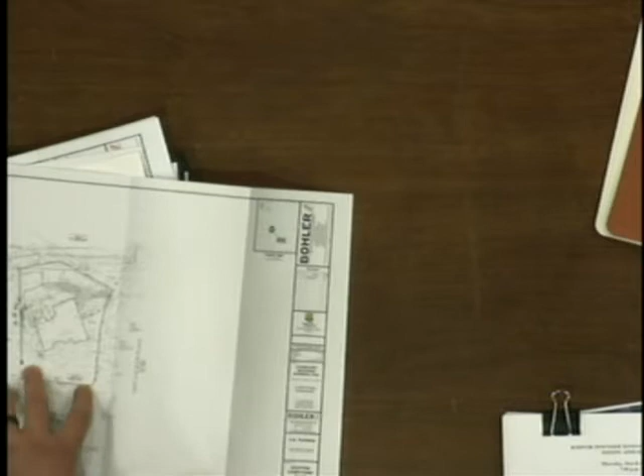Let's jump to Exhibit A7 out of order. Is Exhibit A7 the plan that shows the slopes subject to regulation that require a variance and special exception? This exhibit shows only the slopes greater than 20% that are regulated based on the previously approved grading plans from the original development and when the deck was done. So we've isolated it down to these two portions.

The section in the rear of the house is approximately 500 square feet, sloped at approximately 21%. The area to the right is slightly steeper, but that's only 150 square feet and very similar to what was previously approved as part of the original development.

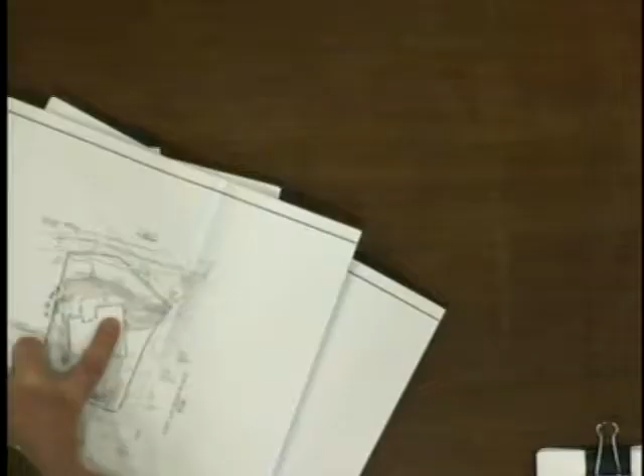Let's go back to Exhibit A5. Walk the board through how you arrived at what slopes are subject to regulation and which are exempt. On this plan, you'll see the light gray and dark gray, based on current conditions. We've also overlaid a red hatched area and a blue hatched area. The red hatched area is from previously approved plans where the slope was shown to be greater than 20%, which we would normally be allowed to disturb.

You can see that some of it does overlap in the eastern portion of the site, which is why it is reduced on Exhibit A7 compared to the original existing conditions plan A4. That's how we're limiting the area we're asking for the variance, based on what was previously approved and what we're going to disturb now.

So the red and blue areas are ones you consider exempt because they were subject to a grading permit? Correct. Do we have a grading permit? It's from the original subdivision plans for the development from 1996.

Is that an exhibit? I don't believe we have the original subdivision plan as an exhibit here. I'm being told by my client that it's recorded here at the township, but it is of record in the township's files.

You do have a portion of it. Is it in the application? A portion of it was included. In this actual application, Exhibit A1 — hold on, it is Exhibit C — has the grading and utility plan from the original Laurier, the DeMoss Tract plan.

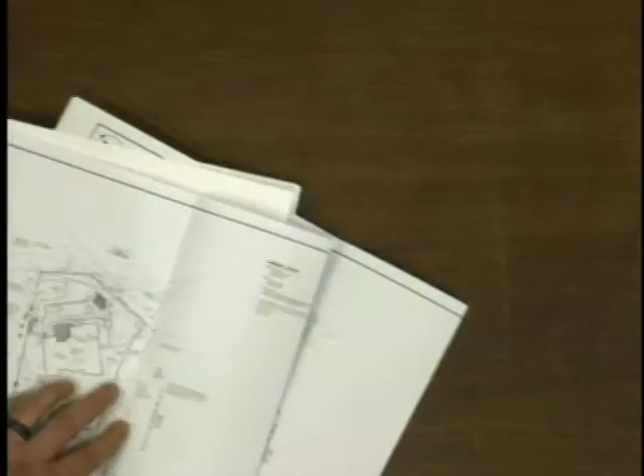I think that establishes the area of steep slopes that we're requesting the variance for as part of a disturbance. So I would next go to Exhibit A6, which shows the improvements being proposed as part of this project. Could you detail what's being proposed here and how this design has changed over time to reduce the encroachment into the steep slopes as much as possible.

There is an existing deck that was built that is currently in need of repair and going to be removed as part of this project. We will be shrinking a portion of the deck to make room for a swimming pool, patio, spa, and pergola. In order to have everything fit on the site, we had to reduce the size, partially based on having two front yards and the constraint for the maximum impervious coverage. So we have reduced the size of the pool, which is shown as 16 feet by 36 feet approximately, whereas we would normally propose something on the order of 20 feet by 40 feet. We have also moved the spa into the pool slightly, further reducing the footprint and disturbance area.

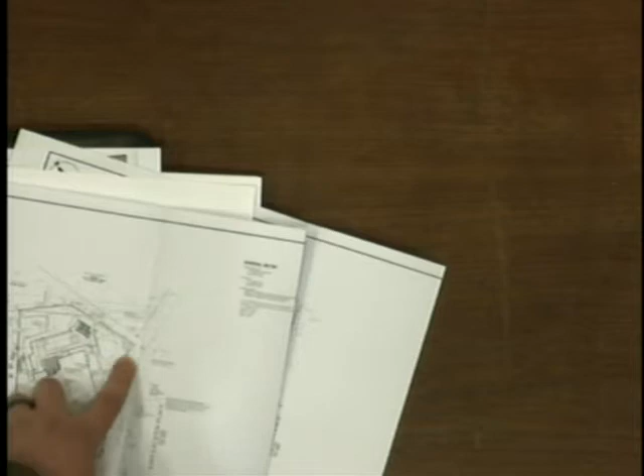As part of this project, we're also proposing stormwater management, which you can see on the eastern side of the property. It is just a rectangular box outside of the decking area and the pergola that's being proposed. That's labeled as the proposed infiltration trench. Correct.

We go to Exhibit A8. Which plan is A8, Chris? A8 is our site grading and E&S plan, which shows the proposed grading, erosion sediment controls, and the rest of the drainage needed for the stormwater management system.

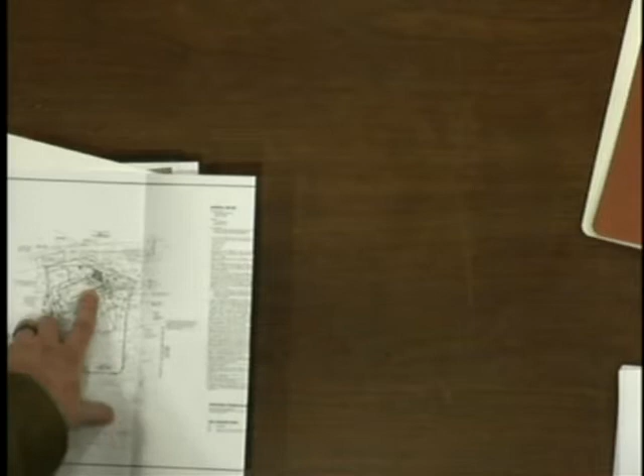Does this plan also overlay the proposed improvements on the sloped areas? Yes. And what areas are impacting what we believe to be the regulated slopes that are 21%? A portion of the spa, swimming pool, and pergola in the back corner of the house. And as part of the special exception, we also have the stormwater management system, which is impacting the slopes in this area to the east. But the remaining portions of the improvements and grading are not in the regulated slopes, correct?

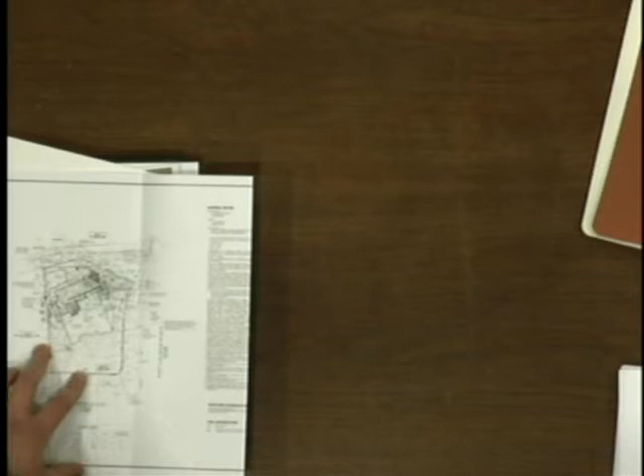Correct. In your opinion, is there any way to access the rear of the house for any construction without going through the steep slope areas? No, the driveway is located on the eastern side of the house, which is where access will be taken from. So you'd have to cross those steep slope areas to get to the rest of the backyard. Yeah, to do any project or construction in the rear of the house, you would have to disturb those areas.

If we go to Exhibit A9, which is an aerial, could you please locate where the proposed residence is located on this aerial? The bottom center of the page, where the pin says 117 Lawyer Place. And are the proposed improvements consistent with the improvements adjacent in terms of pool and decking?

They're actually smaller than the neighboring projects that were done for the swimming pools and decking. And if I go back to the application, I believe there are some photographs of the property, is that correct? Yes. All right, so if we go back to the application, Exhibit A1, Exhibit F attached to A1, I'll give everybody a chance to catch up. There are a number of photographs of the house, isn't that correct?

And if we turn to the third photograph, could you please describe for the board where that's taken from and what it shows? This picture is taken of the rear of the house. On the left-hand side is where the steep slopes are shown on the existing conditions plan that we would be disturbing. Those slopes look pretty gradual, isn't that correct? Yes. And is that the existing deck that's proposed to be removed? Yes.

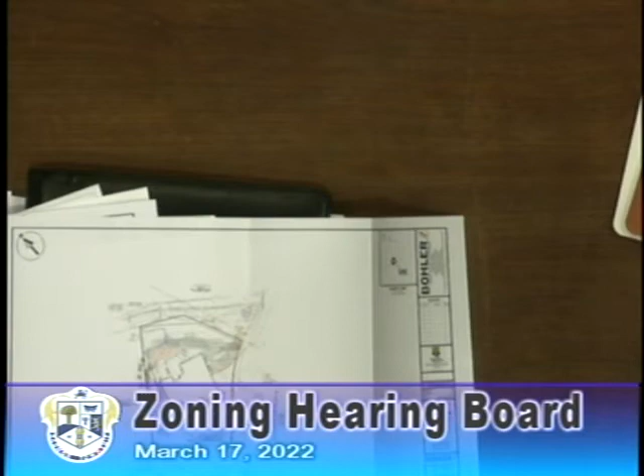I thought you had an open space corridor for the stream. There is an open space for the stream—the stream adjacent to the property, between you and the 200-whatever house, where they have all those stones piled up. Well, we wouldn't be touching that area. That's in the rear, all the way. It's basically a row of hedges that block the stream.

Thank you. Are there any other further questions?

If there are none, I'd like to move for the admission of my exhibits A1 through A11 into the record. So moved. Thank you. Is there any public comment?

Okay, now I'd ask the board if someone wants to make a recommendation. Mr. Chairman, I would move that the applicant be granted relief from Section 280-112D and Section 280-112E of the code to permit disturbance of and improvements upon steep slopes as indicated in the testimony and plans, and in addition, to grant a special exception under Section 280-112N2 of the code to permit the placement of a stormwater management trench in a steep slope area.

Could we add a condition of meeting the requirements of that subsection? With the special exception being subject to meeting the other requirements of that subsection. Jamie, thank you. Discussion?

Anybody? Any questions? Well, I think—thank you for the presentation. You're welcome for being here tonight. I think there's a lot of elements of this that help me get there as far as supporting your application. And assuming everything is as we have seen it, there are certain de minimis aspects of this in my mind. So I would support the motion.

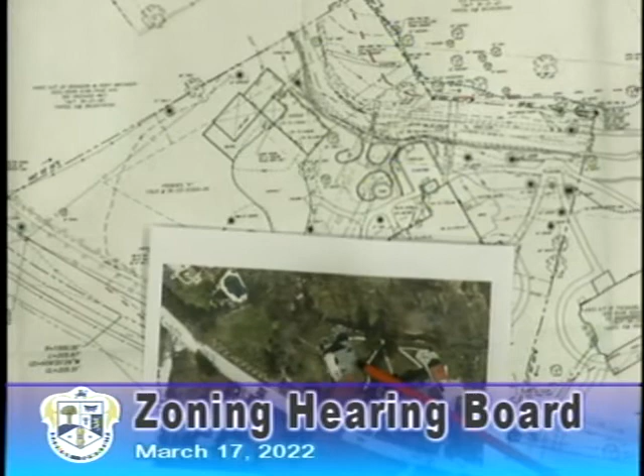Okay, I'm going to show you A3, which is an aerial photo. Can you point where the house is that you own? So hopefully I'm looking at this right. This is the house, and then the garage would be right here. And you see, is this the stream in the back? That is the stream in the back, yes. And here's the road? Yes, and this is Brookside Avenue.

Okay, you mentioned the stormwater runoff. In what direction does that stormwater runoff generally come from? I think you have a slide, and you'll see another one in a bit, but all the water is pretty much coming down Brookside or coming down Askin Road this way, and this is our driveway, so it comes on each side of the driveway and down the driveway through the middle of the property.

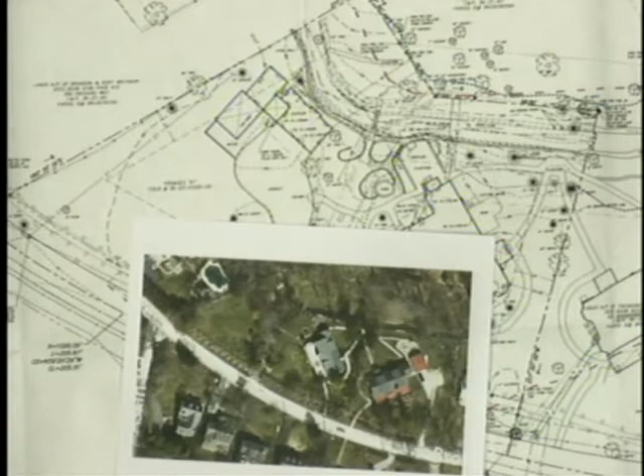All right, I'm going to show you A4, which is another aerial of the house. Is that your property? That is our property, yes. And there's the roadway, correct? Yep. Okay, seems like in the back, at least, it's heavily treed and buffered. Yes.

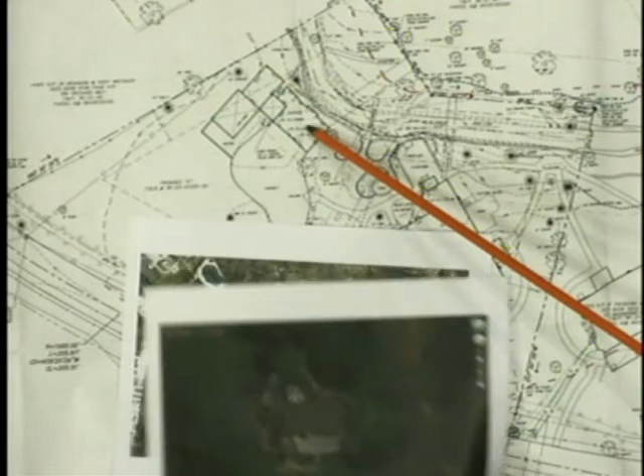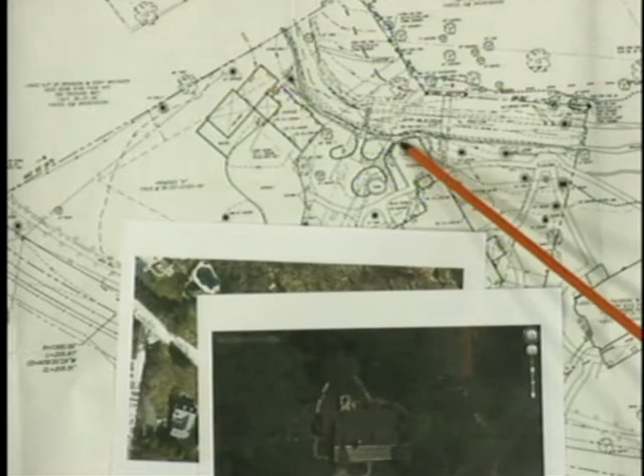So your proposal here is to move the garage outside of the riparian buffer setback, is that right? As much as we can, and again, to try to get it away from the water, which is one of the largest nuisances, all the buildup of debris and flooding in our garage. And this area here where the terrace is, that's going to be moved further from the stream bed, is that right? It will, in a slightly different shape, yeah.

Okay, that's all I have for Mr. Takefman. Maurice will testify next. He's the architect on the project.

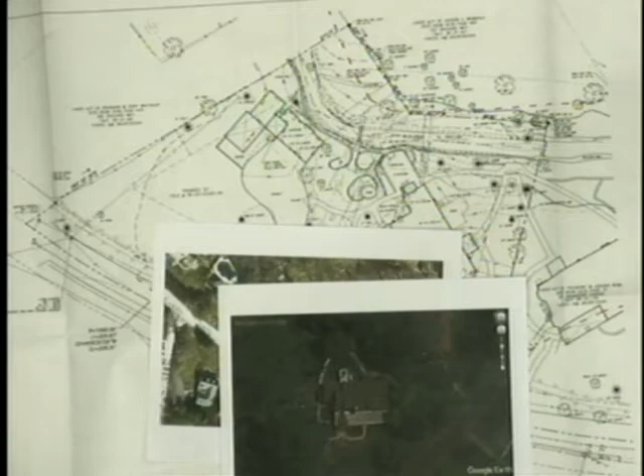I do. Maurice Edwin Weintraub. W-E-I-N-T-R-A-U-B. M-A-U-R-I-C-E. Edwin, yeah, Maurice Edwin Weintraub.

Maurice, what is your profession? I'm an architect. And how long have you been an architect? 40 years or so, over 40 years. What's your educational background? I have an undergraduate degree at Penn State and a graduate degree at Penn, Master of Architecture. Are you a registered Pennsylvania architect in the Commonwealth of Pennsylvania?

What's the age of the property or the age of the home and structures on the property? There is an article from Philadelphia Suburban Homes in November of 1908 that chronicles this structure. You will see a photograph of it from that article. And there's also a companion house next door. If you're familiar with this property, they're kind of mirrors of each other.

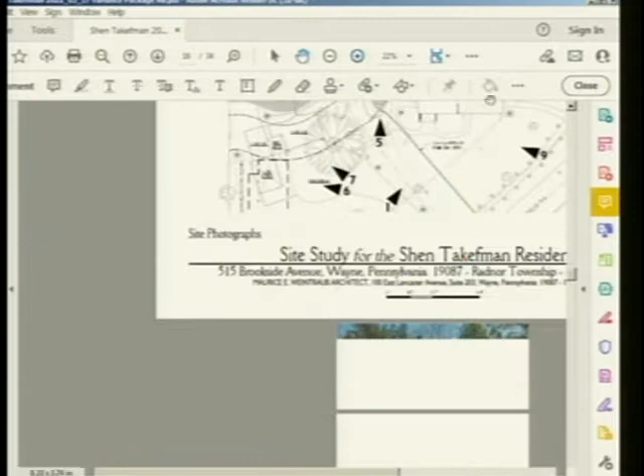I'm trying to zoom in on this. Here, I'll get it. Isn't there? Yeah, there's another thing that I was hoping, yeah. No, there's something that's not here. This isn't working the way I'd like, but anyway, this is picture number one, and this is the front of the house, approximately near the driveway as you enter the property.

This is the front of the house, approximately near the driveway as you enter the property. This is the rear of the house. This shows the existing deck that we hope to replace. This is the side of the house. This shows that side terrace that's been discussed. And down here, you see the pipe.

This pipe went through the property, and somehow there was never any agreement with the township. It's just been through there since whenever, and as part of this process that's been alluded to, the Shen Takefmans basically have granted the township an easement to replace that pipe. That pipe is clogged, and what happens, there's a grate out at the street, right at the base of their driveway, which doesn't drain.

So the replacement of that pipe will help the puddling that occurs in front of the house. That's, if I'm not mistaken, one of four routes from the police station to get out to the township. So the fact that water floods in front of the house—now, as was said, this will not solve the flooding problem. It will alleviate the normal rain occurrence and prevent, hopefully, flooding in the street.

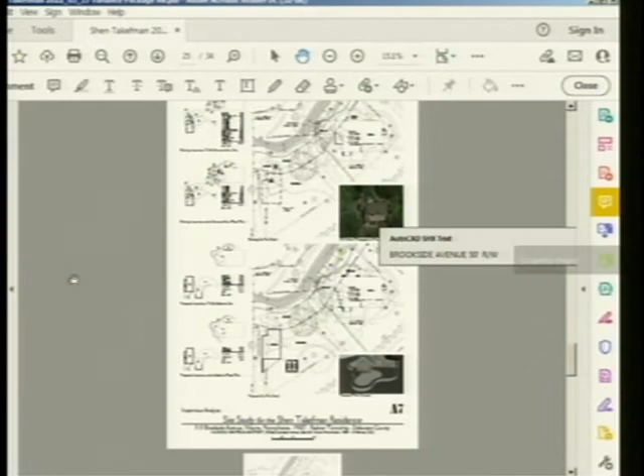Yeah, why don't we go to A, referring to A7, and was this also prepared by you, Maurice? Yes. And if you can, show where the floodplain delineation is located on the plan.

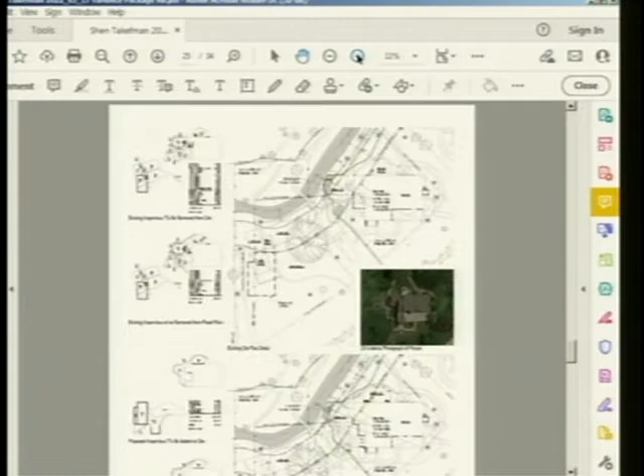I have to say I'm hampered by this. I'm much better on my own thing. This drawing tries to assess two things.

One is the amount of impervious surface that we will be removing, both from the site and from the floodplain area, and then it talks about what we'd like to add back.

What Nick was just saying, this line here is the floodplain line. And you'll note that it wraps around this existing structure. This line here is the pipe that goes through.

These lines here show the 10-foot setback that should be from the stream. And this shows the line of the riparian buffer. You can see here that the garage, the space, and the covered area between the garage and the shed.

So basically, water moves through the site, both from the driveway and along the trellis, and moves like this, and goes into the garage, forced out here, and through the garage here.

This dashed line is what we'd like to propose for the new garage. And we pushed it out of the riparian zone.

And just going back, Maurice, you mentioned where the floodplain line is and what areas are in the floodplain and what areas are not. Everything over here is in the floodplain, to the left of that line. To the left of that line.

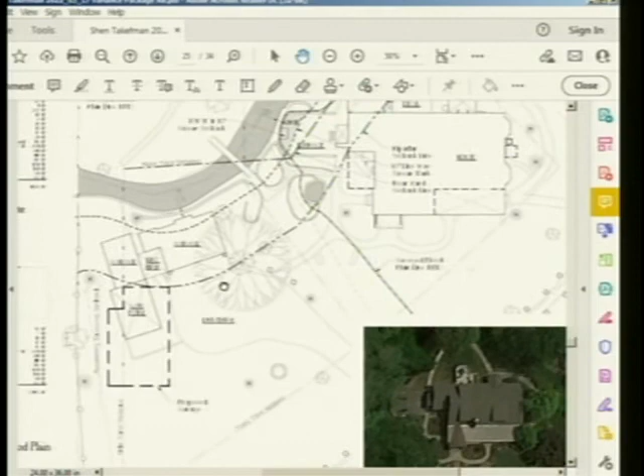If we can address the existing terrace first? I believe A6 shows that terrace as being... Are you talking about, which one are you referring to? The terrace. Yes. The existing terrace, according to A6, is 1 foot 10 inches from the stream bank. Yes, the existing, that's correct.

And the existing terrace appears to be 139 square feet within that 10-foot riparian buffer. Exactly, there's 139 square feet. And just for the board to know, there's a riparian buffer zone for primary structures, and there's a different area for accessory structures, such as garages and terraces. For accessory structures, the riparian buffer is 10 feet. So that's why we indicate one as the 10-foot line, and the other as the actual riparian setback line.

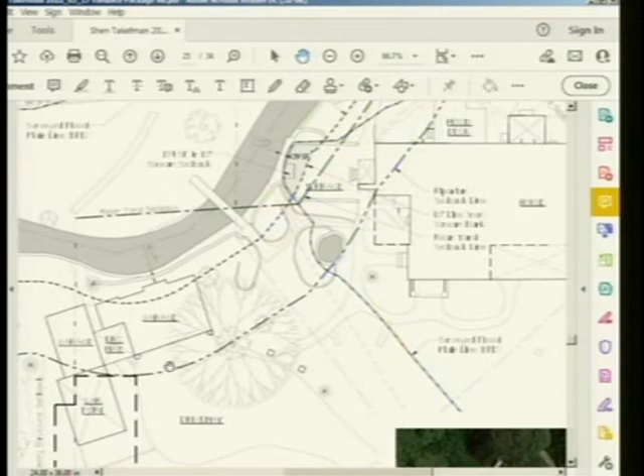And along that line, the existing garage is 4 foot 7 inches away from the bank of the stream. You'll be moving that entirely out of the riparian buffer zone? Yes. We're removing all this structure and other impervious surfaces, like there's a concrete walk here, and this compressed gravel apron.

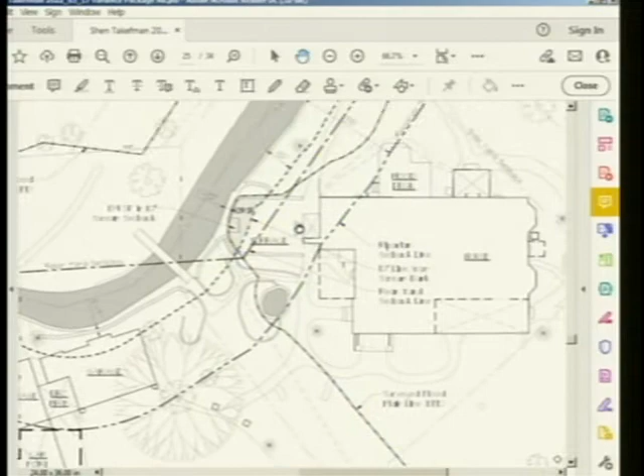All that's within the riparian buffer will be removed. Also, as we had mentioned, currently 139 square feet of the terrace is within the riparian buffer, and your proposed plan, which is A7, indicates a reduction of that, correct? Yes.

This is, I suppose, the existing wooden deck that has a rail, and this is a terrace that sits on grade, surrounded by a low wall and a fireplace at the end.

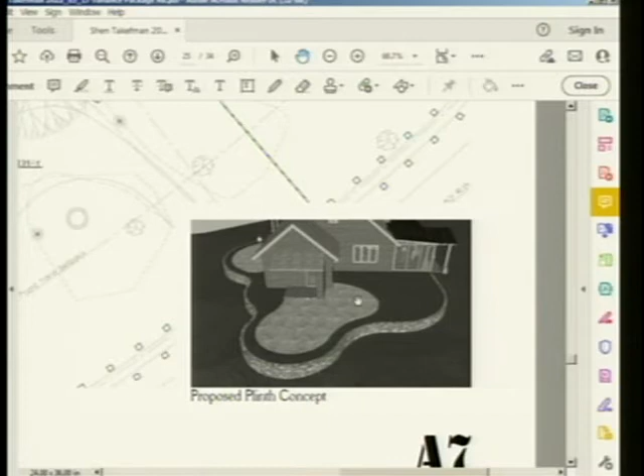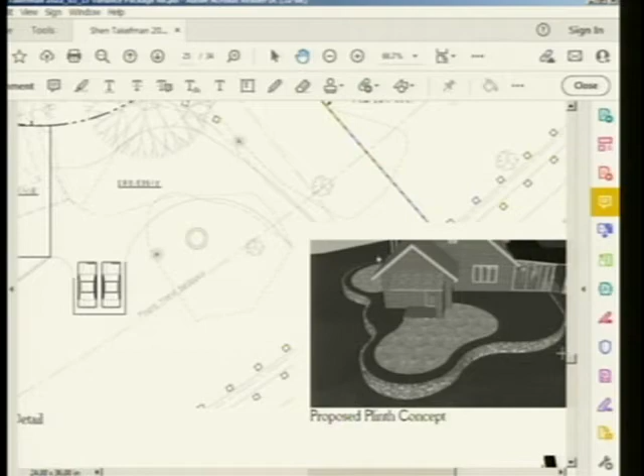What we're hoping to do is create a retaining wall that holds earth and then would support patios, so to speak. This is conceptual — it's a kind of what I call a plinth concept. Part of the idea is to make it so the wall doesn't drop more than 30 inches, which would require a rail, because they have this beautiful view that then gets masked by a rail, so to speak. I guess.

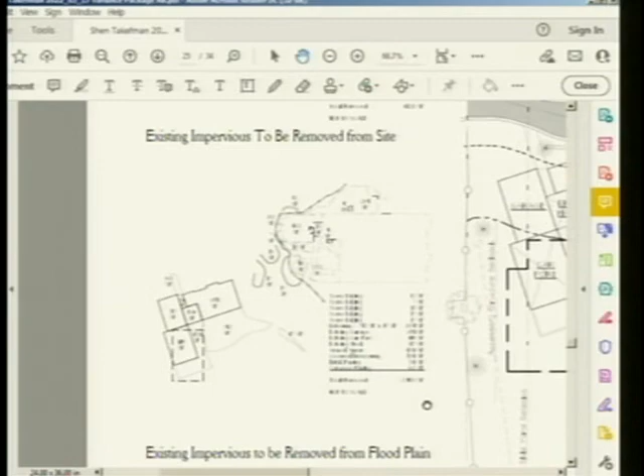So, can I just— Yeah, sure, sure. I think I understand it, but— yeah, so you're removing the wooden deck, you're reducing the size of the existing terrace, but you're really connecting what was the wooden deck. Yes, absolutely.

So I guess these two diagrams associated with the upper part of the drawing quantify all the impervious surface that we would like to remove from the site. The second calculation shows the line of the floodplain and quantifies all the structures that will be removed from the floodplain area.

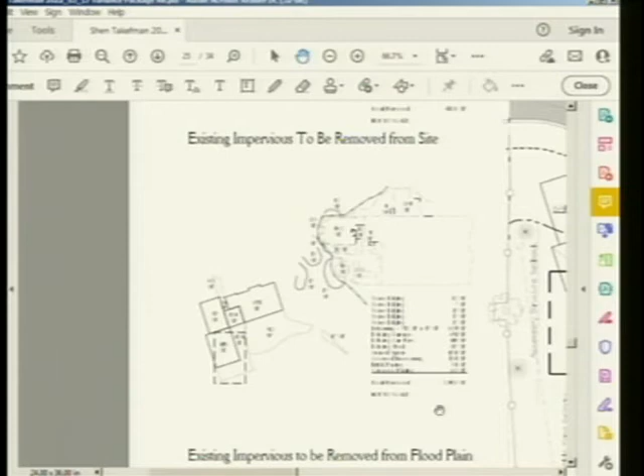Now, when we go back down, we have companion diagrams. This shows the impervious surface we would like to add. Unfortunately this isn't clear, so I can't relay the exact numbers, but the delta is about 650-some square feet less — perhaps you can look on the plan here. Yeah, and it may show you.

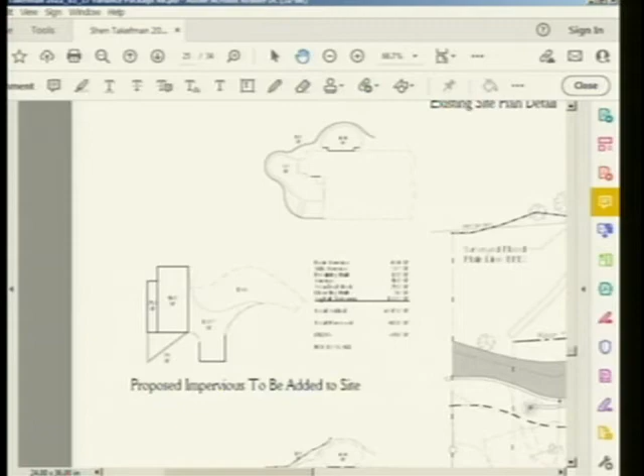So if you can tell the board the amount of impervious surface currently and how much is going to be reduced, both in the floodplain and in the riparian area. So from the site— Yes, this is site A. Yes.

From the site, we're removing 4,128 square feet. From the floodplain, we're removing 2,950 square feet. Then, when we add, we'd like to add 3,470 square feet to the site, with a delta of reducing the impervious surface on the site by 658 square feet. Going to the companion diagram, we're removing 694 square feet from the floodplain.

Is everything clear? I really have nothing else to add. First off, you're accepted as an expert, and welcome to the zoning board. Never been here before. Okay, any questions from the board?

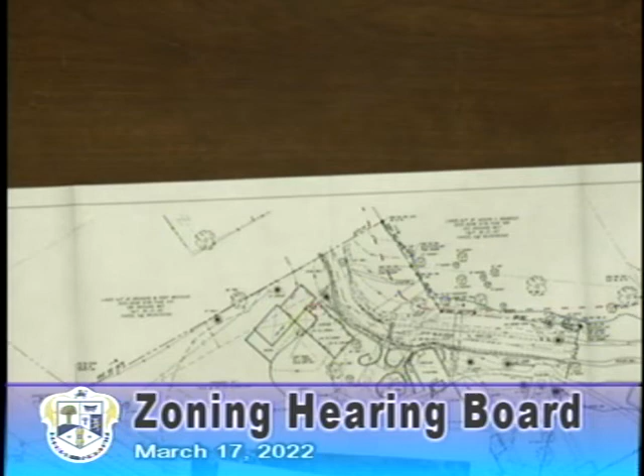Additionally, Maurice, the applicant's going to have to do stormwater management, correct, in accordance with the township requirements? Yes, that's correct. In terms of the terrace, we're just lifting that piece of land, and as of now, that portion hasn't been underwater.

And Dan and Angela moved in beginning of August 2018. It was that flood that was on August 13th. So imagine moving into your new house, you're in there for 13 days, and there was virtually no disclosure in the real estate.

That's a hardship. Just request the exhibits be made part of the record, please. Accepted. Any other questions from board members?

Mr. Chairman, just one quick question. At this point, are these conceptual plans, or how far are you into the ultimate process? They would have to be within the footprint, obviously, but I'll turn that over to Maurice.

Go ahead, these are pretty much the plans. Yes, the garage was wedged in between the side yard setback and the riparian buffer, and the raised plinth concept is all pulled in from the floodplain and so forth.